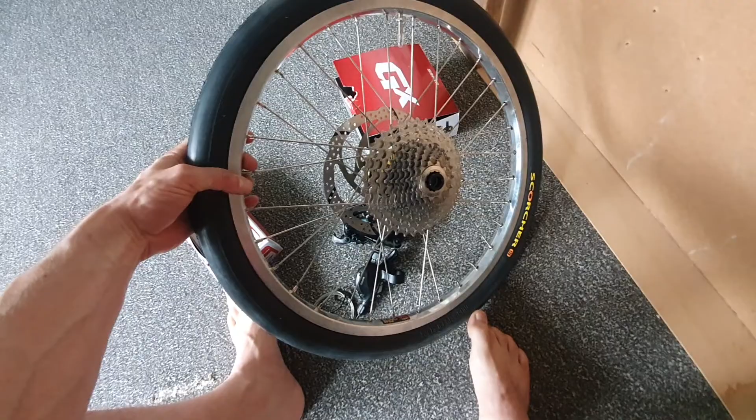Just got my trigger shifter and derailleur in the mail. It's a SRAM GX 10-speed derailleur for my 10-speed cassette, and I've got a 10-speed trigger shifter. Clicky click click click like that. So the biggest this one can take is a 36 tooth, which is 36 tooth on there, so that's pretty good. That gives me a good selection in gear ratios.

So I made this bracket, well, I will be welding it to make a bracket to hold the bearings that will be welded to the axle for each wheel at the front. So I've cut it to 67 degrees. So these are at 120 because the angle of the center of the bearing needs to impact the center of the wheel contact patch on the road for stability and whatnot. So that 67 degrees translates to 7 degrees above horizontal, which is the camber that I'm giving the bike here.

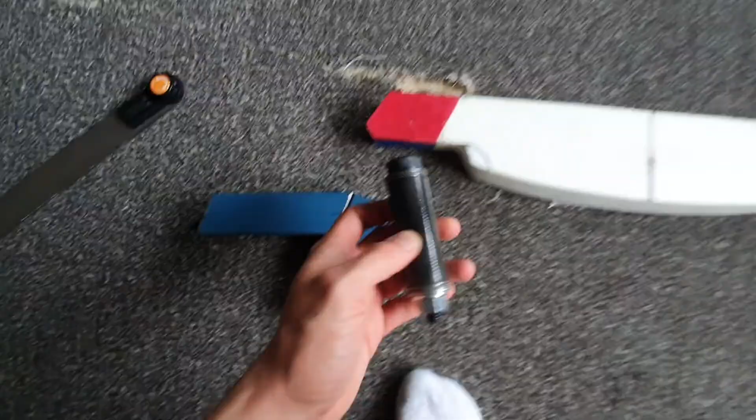So what I'll do is I'll weld this together, and then I can take the bearing assembly and slide it in the middle on one corner, so I can chock something in here to wedge it in there. Then once I machine up the axle, I can lay the axle flush with that and bring that tight along there, and then I can weld in here just a few tacks, and then I can take the carbon race bit off, put it in nice and solid and finish up the welds. But yeah, this will give me the perfect angle, so I know the camber and the alignment's going to be perfect for either side.

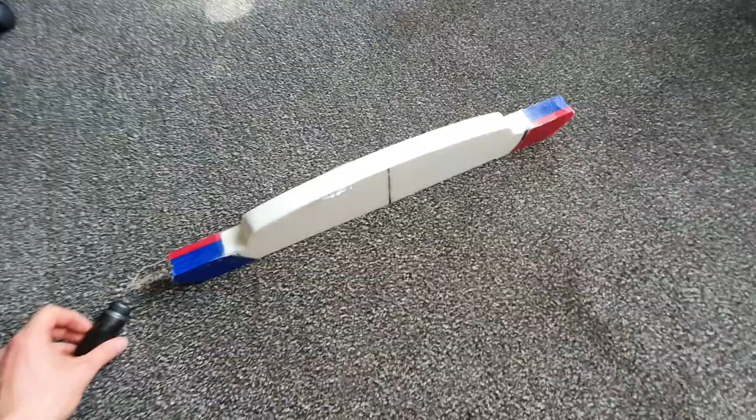And once I've done that, I can then fix this into this side at the exact same positioning, so I can make like a little chock for here, and then lay it upside down and glue it in like that, so I know they're both exactly the same height. Once I've got that, then I can stick it in the bike.

So I'll do all this, and the welding, I'll do that first before I focus on gluing this into there, because if I do that, then I'm stuck. I kind of don't know what I'm doing. I could do it. I could just take this bolt out and stick the bolt in, but it will make it a lot easier with that.

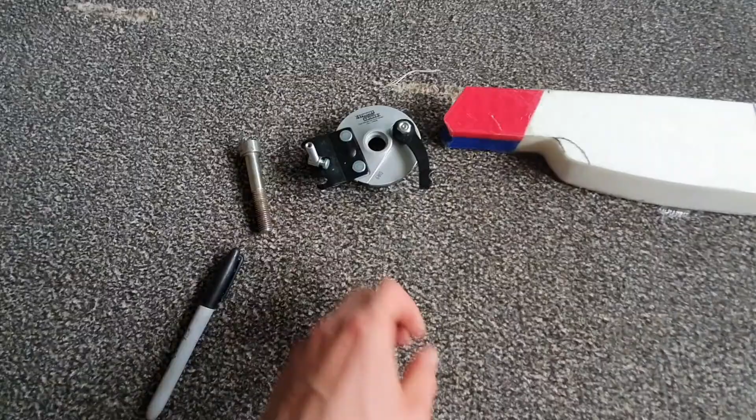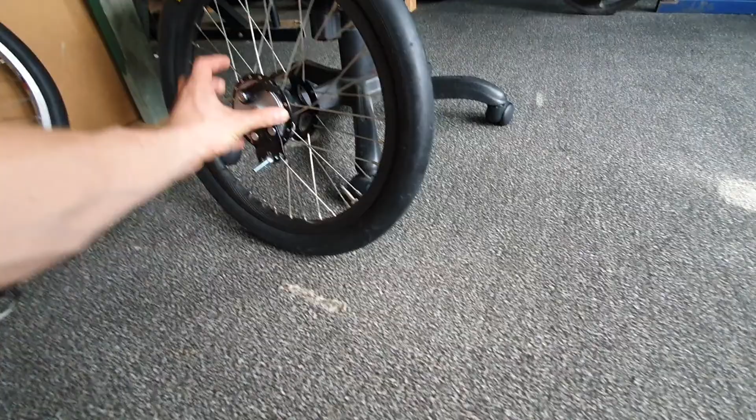Now it is time to design the axle. So I will be measuring the diameter of this and then placing it inside the wheel, making sure I've got the right length and everything, and doing all my measurements on that. And yeah, I'll design that on CAD and then maybe 3D print one.

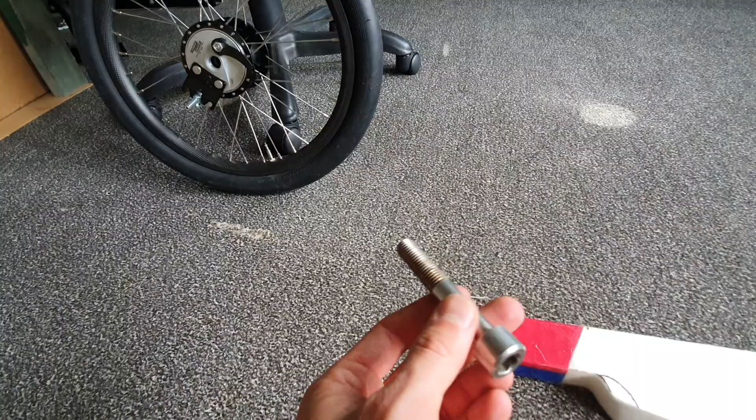I don't know how that's going to go because it doesn't really print circles very well, especially in 12mm diameter. But yeah, I might make a mock-up one just to see what it looks like first in place, and then figure out where I'm going to go from there.

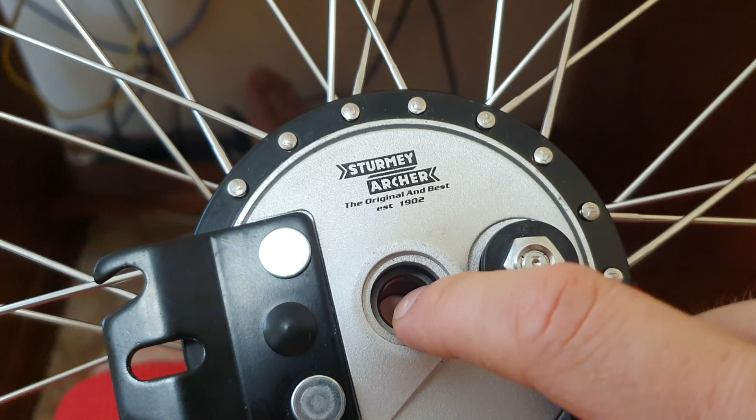Just finished designing the axle. I've got a step for here to go from the bearing up to this first lip. The second lip is this step here, and then that third lip is the space from this flat to the flat of this, plus

3mm, because I'll be welding a 3mm plate onto that axle, which will come out here and bolt through to this to stop the brake twisting back and forth. And then I've got 60mm to play with here.

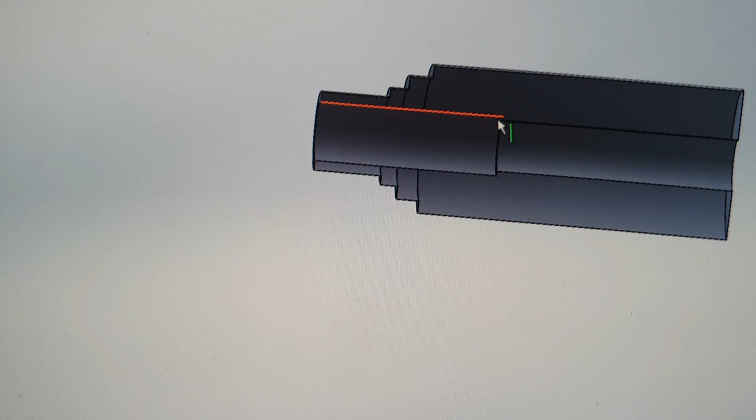Inside I've got a 12mm shoulder for a shoulder bolt that I'm getting, and then a 10.2mm hole for the 10mm thread. Sorry, 8.2mm, 8.5mm hole, I think, for the 10mm thread of the shoulder bolt.

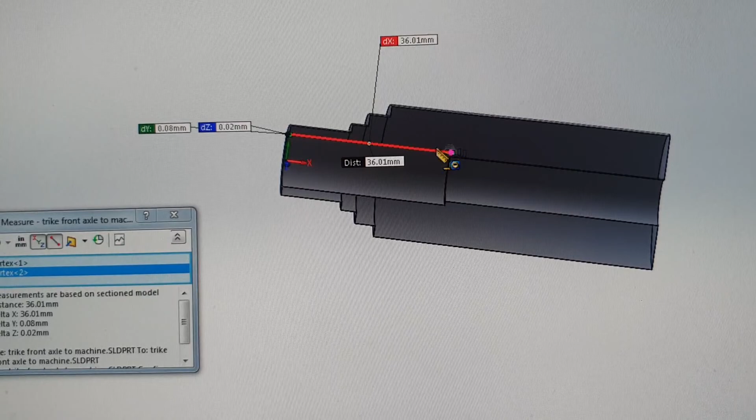So from there to there, I've got 36mm of bolt going into the axle before it starts to thread, and I'll have about 12mm of thread inside the axle where the bolt threads into.

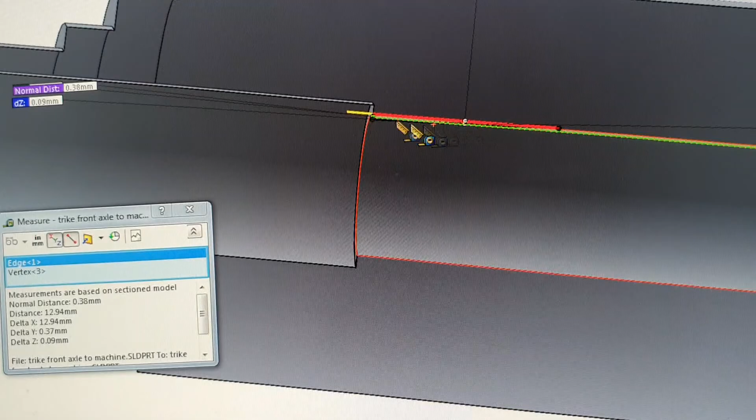I haven't yet decided on an external diameter. I've just got it roughed out to 30mm now, so I've got to go see what round bar I can get in mild steel, what sizes they sell, and just adjust that accordingly.

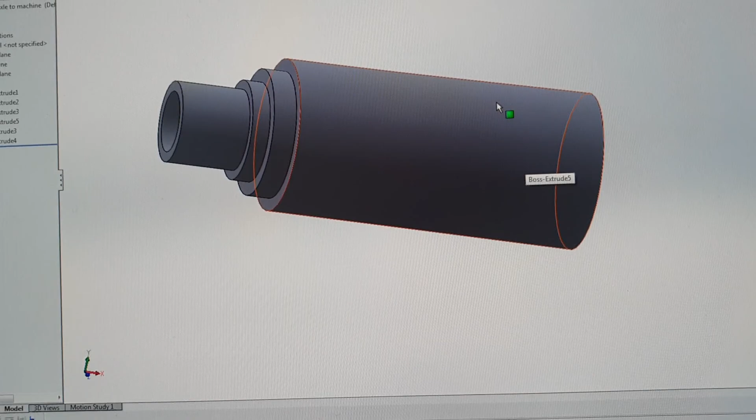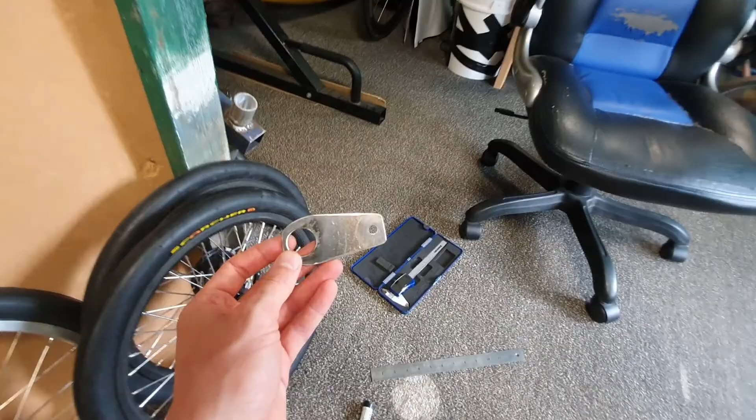Well, I am back from my weekend away. While I was away, I got my shoulder bolts for the front axles. So it sticks out that far from the end of the brake mount, and I've also made these little attachments that will be welded onto the axle mount and bolt through just here. So that'll stop the front brake from rotating when I put the brakes on.

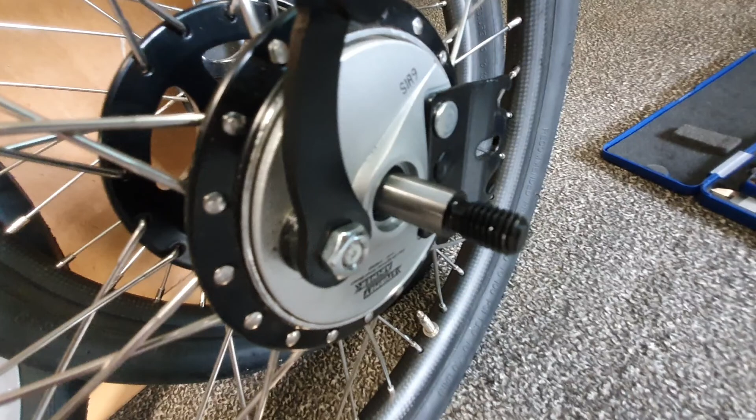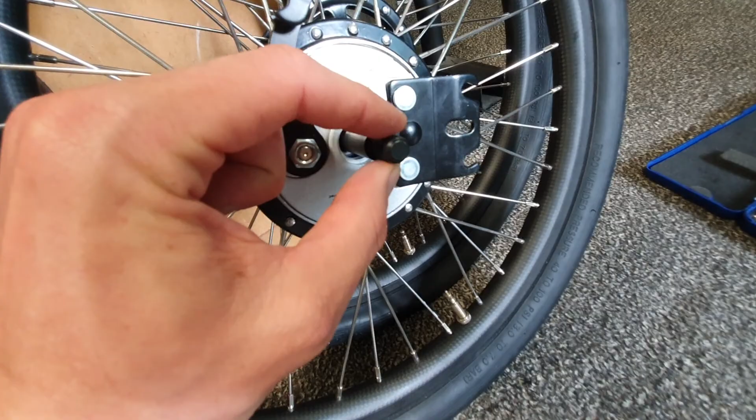You can see there's not much meat between the shoulder bolt and what will be the inside of the axle mount. So that's why I've got so much meat on the shoulder bolt sticking through. So by the time it comes through and steps up and then steps up again, there will be more meat for where the threaded section attaches into.

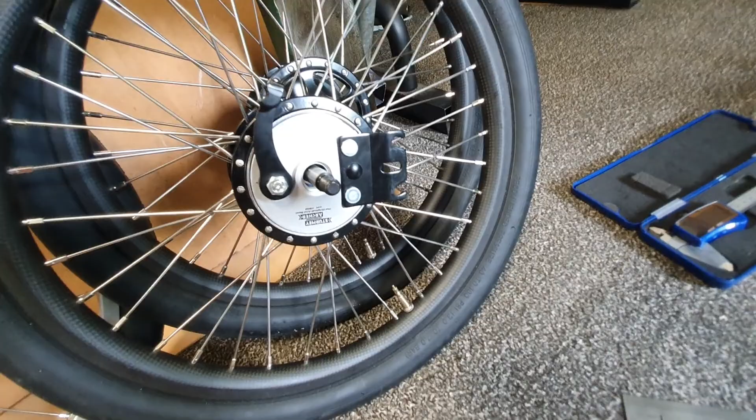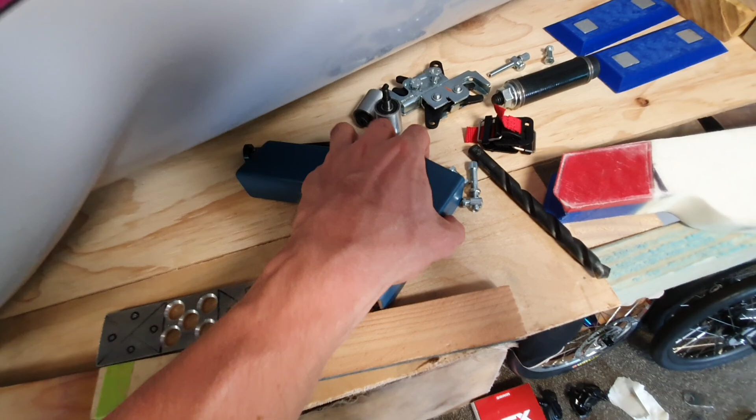So next week I'll hopefully be cutting and turning up those attachment points. I've got the bracket here that I've marked out ready as a jig for welding the axle mounts on. So I'll take that over to my dad's and weld it up, clean it up and make it all square and nice, and then I can start machining the mounts for it. So that's it for this week's episode.